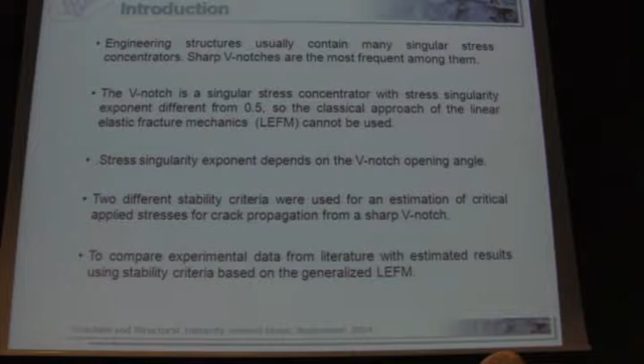The stress distribution in front of the sharp V-notch is a little bit different from the stress distribution in front of a crack. The difference is in the stress singularity. In the case of a crack, the stress singularity is 0.5. In a V-notch, the stress singularity exponent depends on the V-notch opening angle, and this value varies from 0 to 0.5.

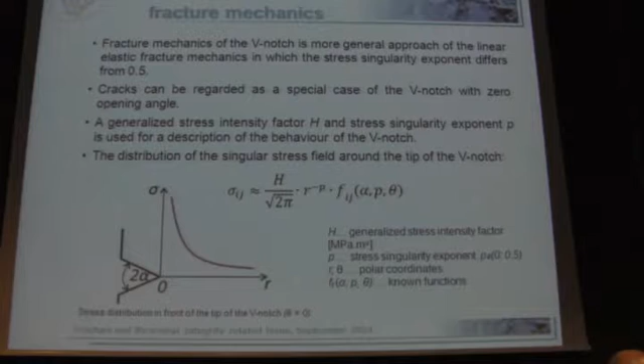So we cannot use the classical stress intensity factor. We have to use a special unit, the so-called generalized stress intensity factor, which can take into account the change of stress singularity. So we cannot use the classical fracture criteria known for cracks. We have to use special ones which are able to describe the special stress singularity.

For any fracture criteria, we have to know the stress distribution around the crack tip or around the V-notch tip. So we have to know the generalized stress intensity factor H, and we have to know the stress singularity exponent. We can obtain the generalized stress intensity factor, for example, from a so-called direct method: we calculate the stress field by finite elements, and then extrapolate the value of opening stress to the notch tip to obtain this value.

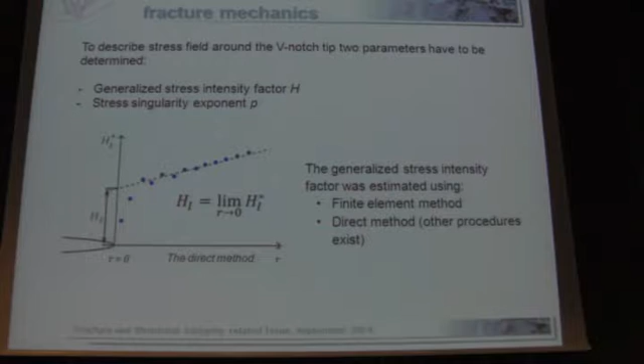We can calculate this value by other methods, for example by a so-called M integral. There exist several numerical approaches. To obtain the stress singularity exponent, we can use this characteristic equation, or we can determine this value from numerical solution as a slope of the opening stress in a log graph.

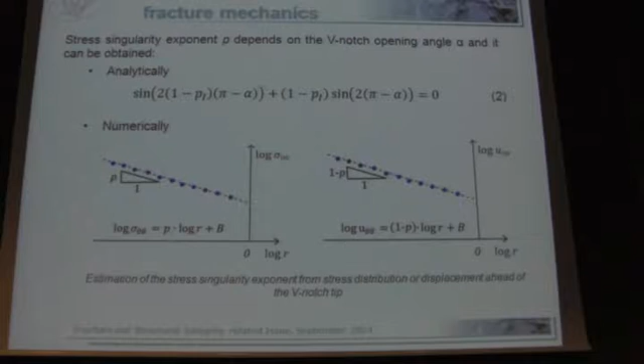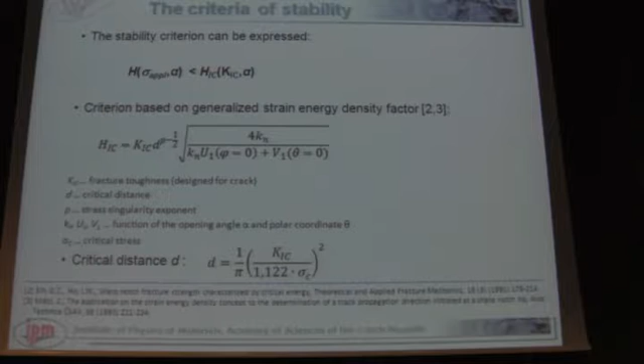Here you can see the final expression for determination of the critical value. This value depends on the fracture toughness of the material, so no special material characteristic needs to be measured, and on some parameter d, which we can call the critical distance. This parameter depends on the mechanism of crack propagation, and in our case we used this expression. Here are some known functions; I have no time to speak about it now.

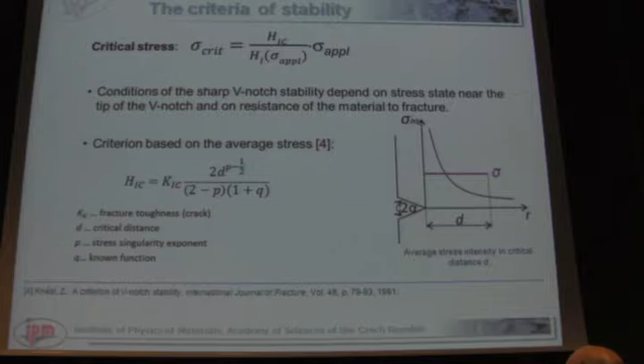I would like to show you results from our calculations. In the first case, we considered a double-edge specimen loaded by tension. We changed the V-notch opening angle from 0 to 70 degrees with a step of 10 degrees. Here you can see results: the red markings are experimental data, and the blue and yellow marks are from our calculations.

You can see very good correlation with the experimental data. These data were obtained on PMMA, polymethyl methacrylate. Here you can see material data of this kind of material. You know that this material is really brittle, so the calculated data fits very well the V-notch behavior.

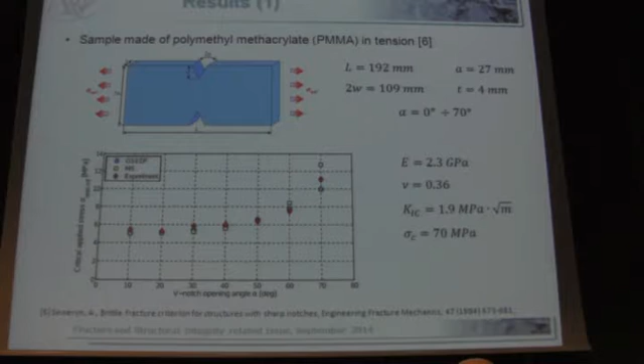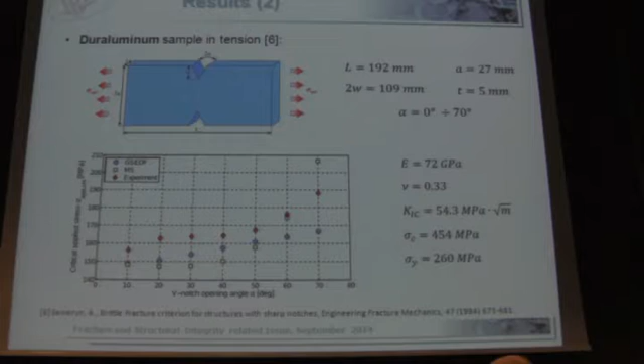Now you can see the same geometry of specimen, but the material is different: duraluminum, which is ductile. Here you can see calculated results. There is some difference between calculated data and measured data, but the difference is not huge - there is a different scale on the vertical axis. The difference is about 10%.

So it is not so bad, because the material is ductile, and you can see on this slide that there is a very important plastic zone ahead of the V-notch. If we take into account this fact, the calculated results are very good, because the plastic zone is important in this case, and we can use this criterion for duraluminum as well.

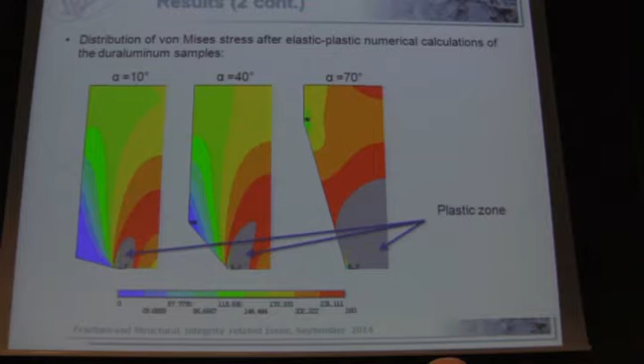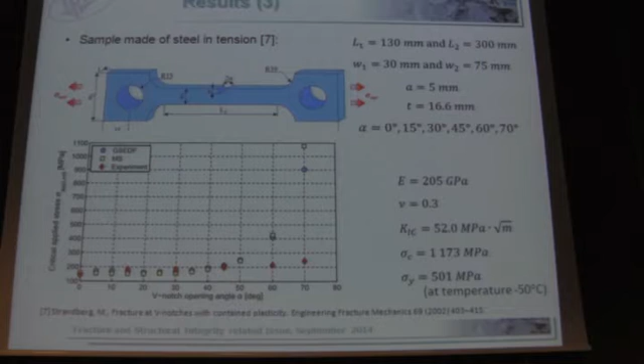Here you can see another case: a single-edge tension specimen. The material of the specimen is steel, very ductile, quite ductile steel. Here you can see a huge difference between calculated and measured data. The reason is a very huge plastic zone around the V-notch. You can see that for 70 degrees of V-notch opening angle, the specimen is fully plastic, so in this case we cannot use this criterion. It's a logical result.

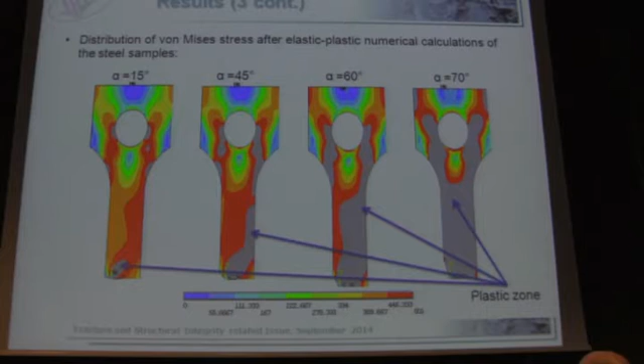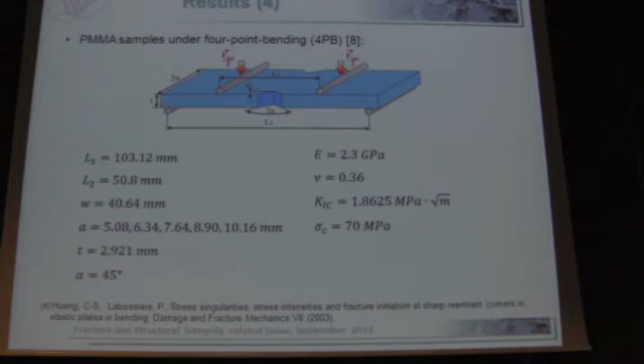Next case is a sample made of PMMA loaded by 4-point bending. In this case, we calculated the stress singularity exponent from the characteristic equation analytically. Here you can see for this calculation a huge difference, about 20%, between prediction and experimental data. But the crack propagation is a little bit special in this case, because the crack initiates at one point at the tip.

This exponent is derived for a specimen loaded by tension, but here we have bending, and the crack propagation or initiation is a little bit different. So in this case we have to take into account the so-called vertex singularity effect of the free surface. We calculated numerically the stress singularity exponent in this case - here you can see its value, very different from the previous case. When we took into account this value, the effect of the free surface, you can see very good correlation between calculated and measured data.

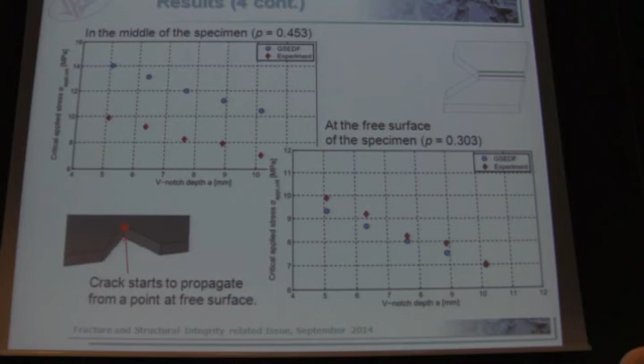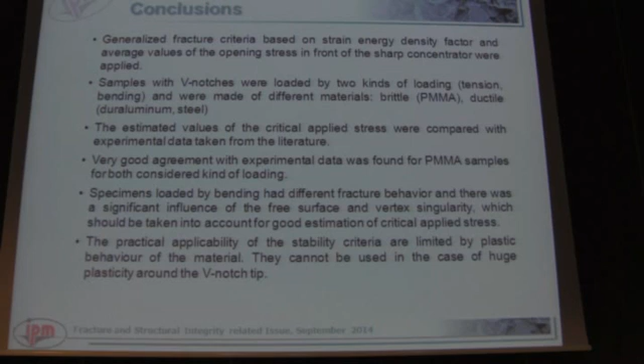I have introduced you results from two criteria derived at my institute. You can see that they are quite well applicable in the case of brittle materials or a little bit ductile materials. These criteria can be used in cases where the vertex singularity is present, so they are able to take into account the effect of the free surface. Thank you very much for your attention.